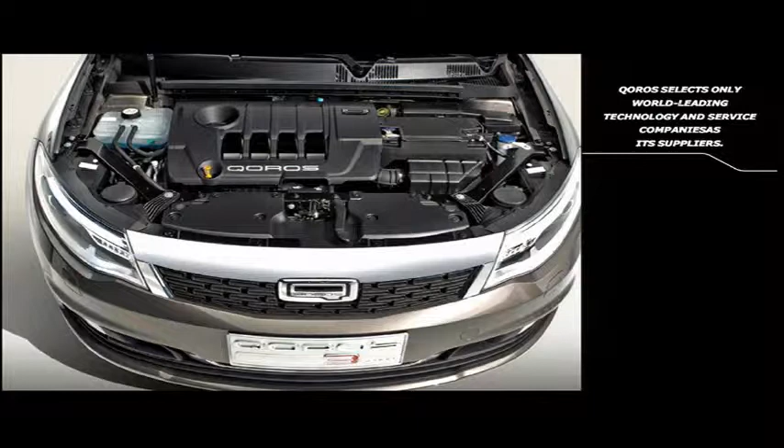Our product is all focused on design, engineering, and safety, as you will know. It's all about creating different car models, different cars and different products for new, young, modern, urban people who are all about services, IT, communication, and connection to the world more than average right now. For our product, we select all international and best technologies in terms of manufacturing as well as engineering.

We also choose all the best class suppliers and partners all around the world. So we can proudly say that all the international suppliers who right now support all the other OEMs also decided to support us, and we are very proud of that.

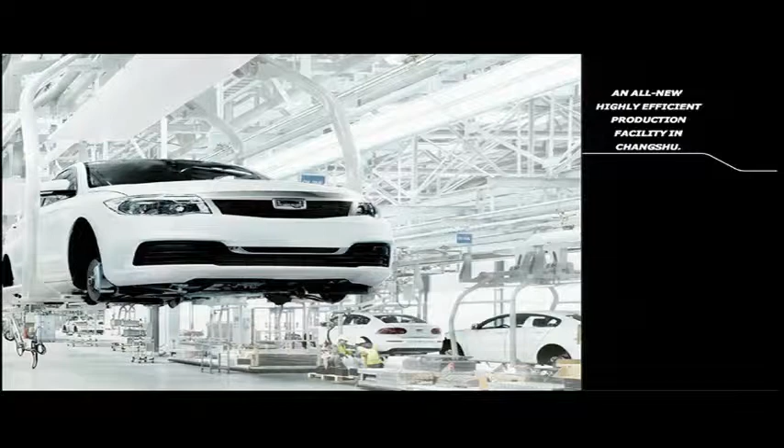We have an all-new, brand-new greenfield facility, so we're not only a greenfield company, but also a greenfield plant - the first one ever for us, in Changshu. This is around 80 kilometers away from Shanghai, in Suzhou, in Jiangsu province. All new facility, all new equipment, all new people, everything brought together within a couple of years.

And right now we are in serial production, and we are actually already selling cars for a couple of months, which I will share with you a bit later.

In terms of our facilities, we consider ourselves international, and we have facilities both in China as well as in Europe. In China, we have 3 facilities - our headquarter plant in Changshu, but also 2 facilities in Shanghai. The first facility in Shanghai is in Lujiazui, where we have our operations center, and where we have all the marketing and sales and the typical HQ people.

But then we also have a second facility in Shanghai, which is our tech center. It's also in Pudong, where all the testing and engineering and the hard work is happening. Besides that, we consider 2 locations in Europe as well.

Our design center, QDT, is based in Munich. Our design chief, Gerd Hildebrand - if you know the car from BMW Mini, where he used to design Mini - now he designs Qoros. And we have a very big collaboration with Magna Steyr in Graz, Austria, where hundreds, if I would like to say even thousands, of engineers helped us in partnership to develop the car.

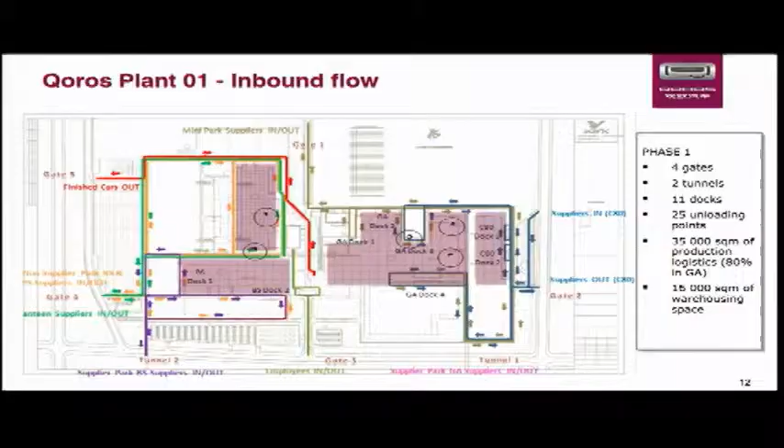This is our overview of the plant. You can see here all of the flow. Here is a mini park on the north side where all the sequencing suppliers are holding on, small facilities between 2,000 to 6,000 square meters. And we have a direct internal road to control the JIS transport, so no on-road transport.

Here is our plant, and here you can also see tunnel 2, which already exists and is in use with the stamped part suppliers, through which we transport material with special tuggers, with non-standard trailers built specifically to match Qoros racking.

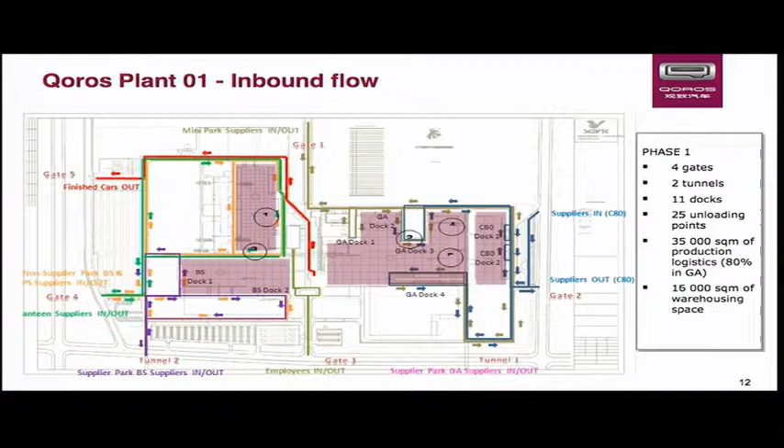Here is the second tunnel, now under construction, which we will need for the second part of the logistics center. On the south of the plant, the supplier park is also building up some suppliers for general assembly for the other parts.

Then we went to plan material flow. It was two parallel activities where we needed to make strategic decisions, having in mind all the products, the models, and one facility—what are we going to do about it? From all the varieties of methods available, standard in the industry—sequencing, Kanbans, everything—what do we want to do? Investigate one by one, match ourselves, or just go with one lead? This is where we made a very fast and very big decision.

We are going 100% kitting. Right now, in the total general assembly, only 12 parts are on Kanban. Everything else is kitted. That means we can swap models, change models, produce with 100% flexibility on the line, and operators can barely recognize that they are building another model—they just pick parts from the box. At the same time, we said, okay, this is the method we are going for, and what's next?

Strategical equipment sourcing. What equipment do we want to have? Because if I, 3 years ago, collected all the catalogs from all the possible suppliers in the world, I could choose forever, but I need to choose the type. Not a type of forklift, but are we going forklifts? Are we going tow motors? Are we going platforms? Out of that, we said we are going all mobile.

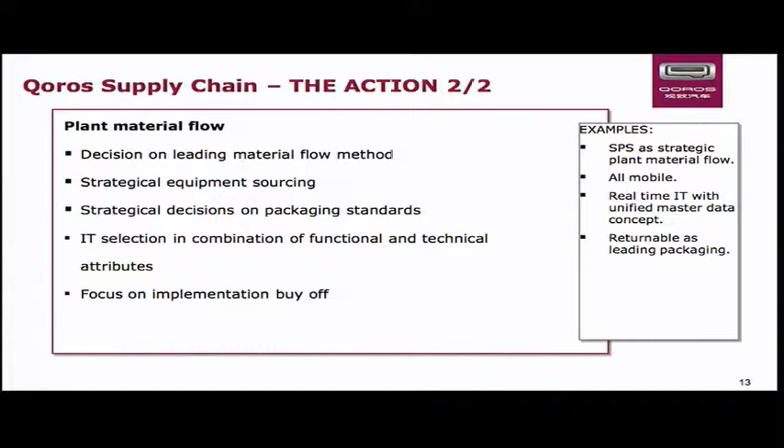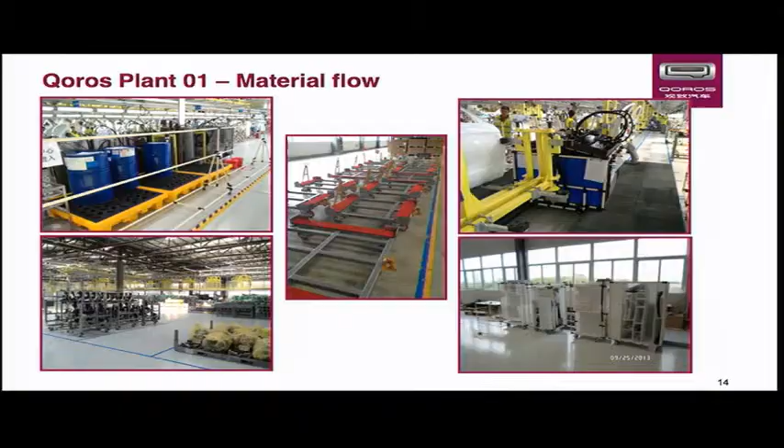One thing I'd like to mention here, which we had a lot of fun with but also was one of the challenges, are all the non-standard single cases - single things that we need to take care of in the plant that normally you just forget.

All of the chemicals, all of the jigs that you have to return from general assembly back to paint shop, all of the labels, the bags and everything, which in a normal plant launch you usually put on a lower priority. We were a new company. We had to make sure that we're not going to only have it on a lower priority, but also not forget about it. So it was a big challenge for us to have a standard process where all people know how to work in it, but also know the exceptions. Engineering a supply chain for a VIN label or a certificate paper that comes in once in a while and has to be specific, making sure they use the same equipment and methodology for all those non-standard special cases, that was a big challenge for us.

As a result, we are very happy with what happened in the plant and with our supply chain. We are very grateful for what happened in our supply base, for all who cooperated with us throughout those tough times. We have above average responsiveness and very low risk against high complexity.

Right now in the plant, in the Chinese model that is already launched, the sedan, there's something around 200,000 variants possible to be produced. Of course sales and marketing doesn't order all of them, but we are still able to produce them.

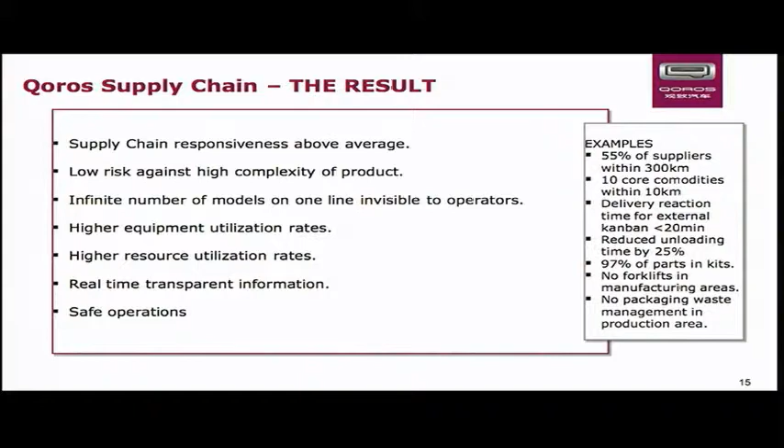We have a higher rate of equipment efficiency because the operator only assembles, he doesn't have to go away from the station or make a choice. We have higher resource utilization, real-time transparent information, and at the end, we are safe. We pay high attention to our operations, making sure the equipment, the IT, and the operations are safe for the people.

Thank you very much, I hope you enjoyed it. A couple of insights about us.

At the very end, I'd just like to say this is our latest product, the Qoros 3 Hatch, which will be premiered this Sunday at the Beijing Auto Show. This is our second model, and we are very proud to say, I personally like it a lot, very European style. It got the Red Dot Design Award. For those who know and don't know, this is a very prestigious design award, and we are very proud of it, and we like to show off for it. Thank you very much.

Thank you very much, Paulina, for sharing all of that with us. I think it's really fascinating to see the opportunity to start with the supply chain vision and build from there. There aren't too many places in the world where you have that opportunity, especially with a new brand starting from scratch. So I think that was really interesting, really useful. We'll come back for more, I'm sure there'll be plenty of Q&A. But let's move swiftly to our next presentations.

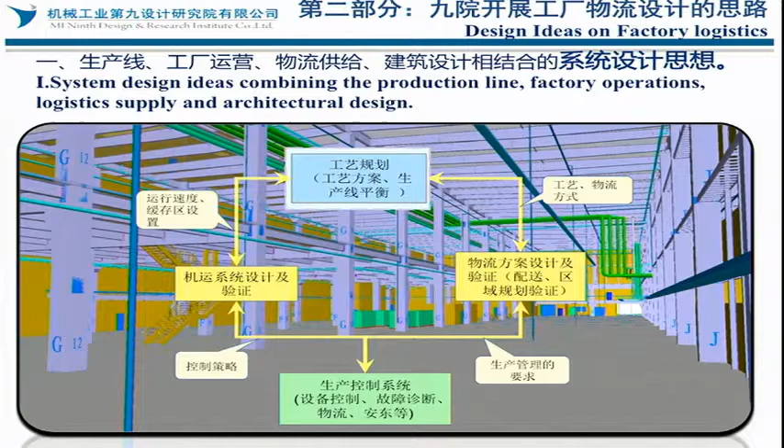We are mainly focused on verification and control of the processes, considering the equipment, the control of equipment, and the diagnosis of potential failures. We also need to consider safety so we can satisfy future needs. So we take the workshop as a box, and this box has to surround a core - that's our designing philosophy.

Then I will be talking about logistic program design and verification. We first needed to design the logistic process, considering the status quo of logistics and distribution to find weaknesses so we can optimize the process.

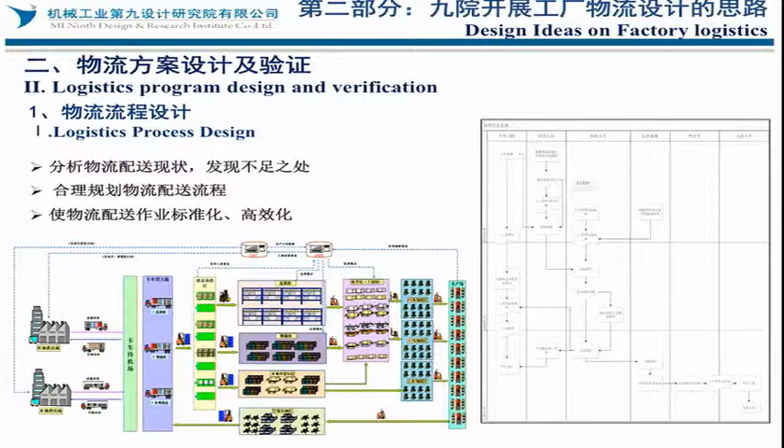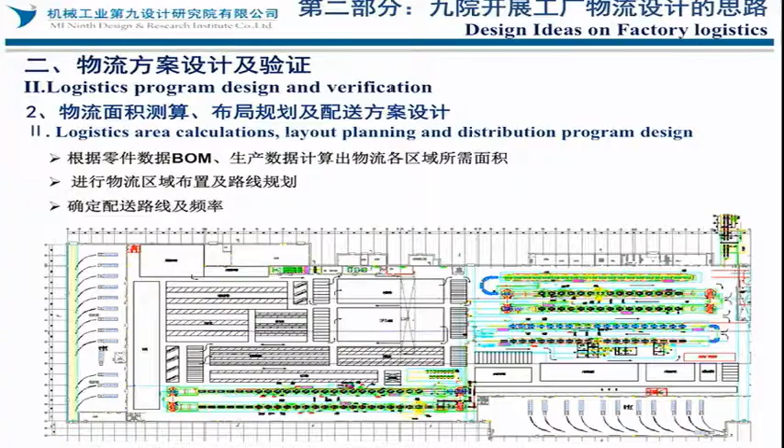Secondly, we needed to consider the total area taken up by logistical programs, and we have software to do the demonstration. We calculate the area required by each logistic item, and we need to design the routes and frequencies as well.

Thirdly, we also need to do a simulation on the EM plant software to do the analysis. Through the simulation, we can test whether the plan is in line with our original thoughts.

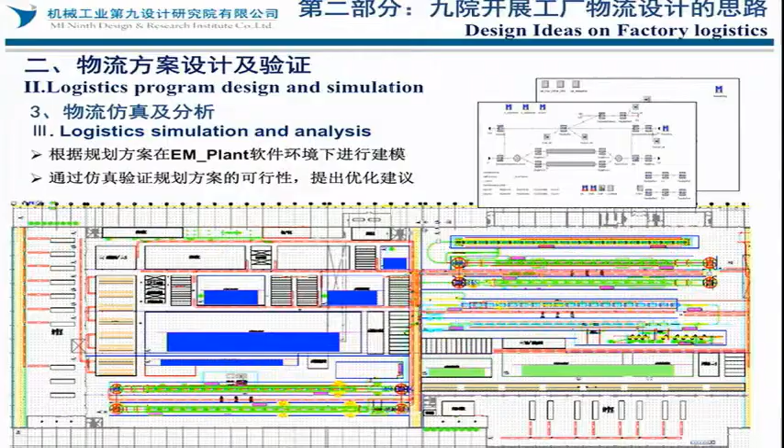I want to play an animation - I don't know whether I'll be successful. This is a simulation of a designed factory in Jilin.

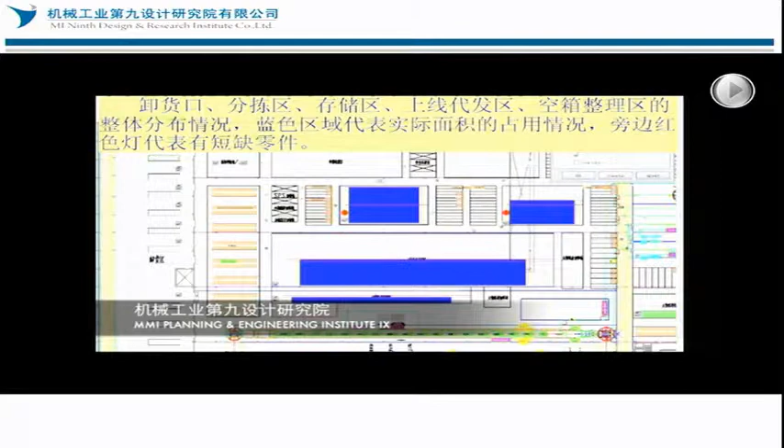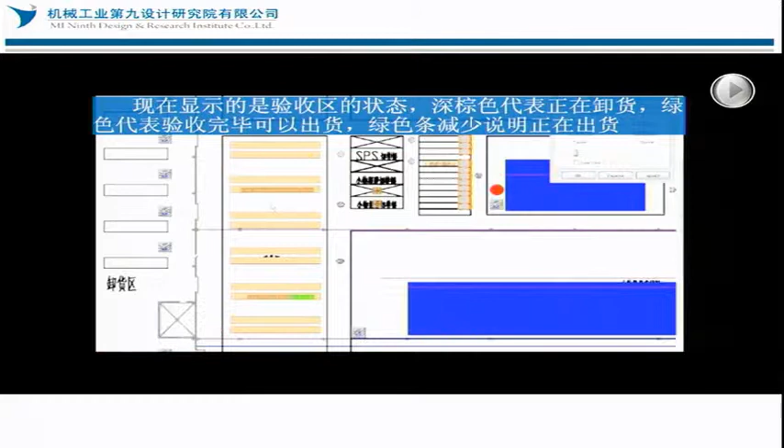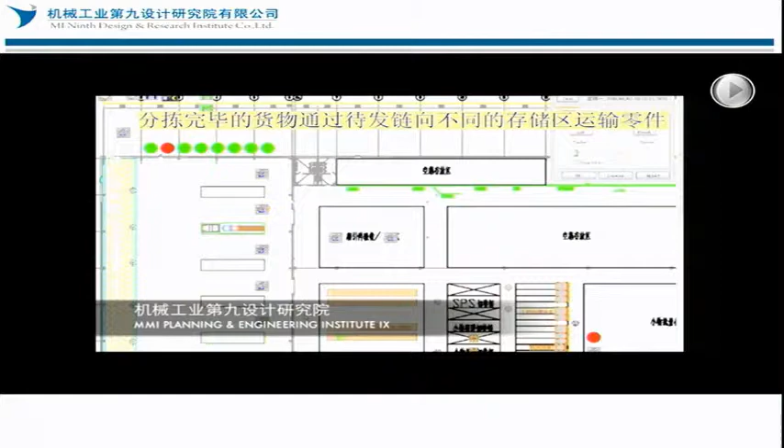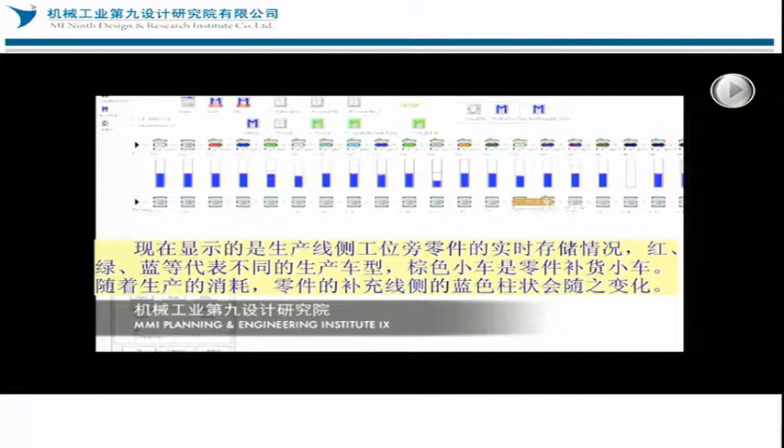This is like a loading, unloading, and waiting area - this is the area taken by each function, and this is the waiting area for items which have run out. The green area means the post-verification area, and this is the unloading area shown by red light, where red means occupied and green means normal. This is the sorted goods to be dispatched to warehouses, and these are parts by the production line showing the stockpile, with small vehicles for replenishment.

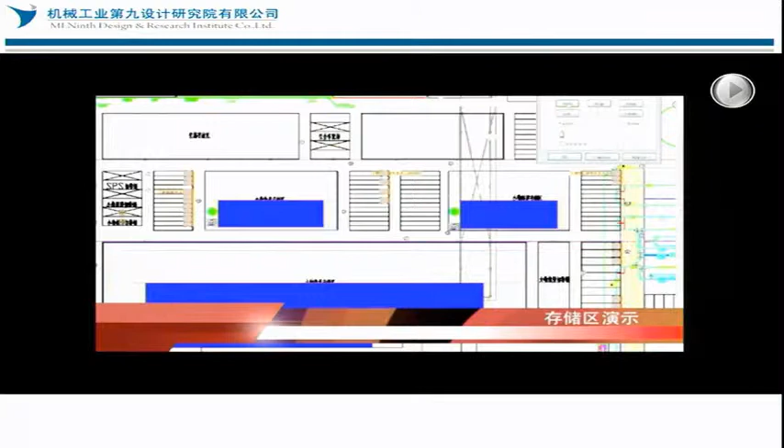With changes in volume, there will be timely replenishment. This is the store area - a real-time picture of the store area and the inventory. So we use the software to do the designing for logistic purposes, and they can satisfy the needs of the factories.

Secondly, I'll be talking about integrations of different kinds. I mentioned that we design processes, how processes can be in line, hand in hand with logistics.

This is Volkswagen's new factory in Foshan City, and this is the supply area, the just-in-time or JIT area. We designed this area closer to the exterior of the factory, and also closer to the assembly line - like the gears, transmission, and framework placed here, with SPS parts and sequenced products piled here so they can get to the assembly line very quickly.

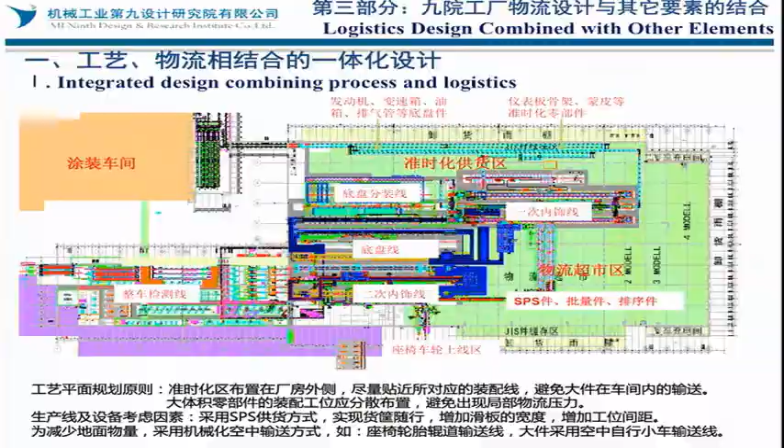This area is a painting workshop, and we put them into sequence - this is for seats installation. We put them into different places to avoid huge piles in one area - this is a new design, and we also adopted the SPS supply method so we can realize just-in-time.

To realize just-in-time or just-in-sequence, we need to consider the distances, and we also need conveying belts - we call it aerial conveyors. This is a factory for Volkswagen, the newest one for Volkswagen in China.

Then I'll give another example, Toyota. Also a new factory - in the Toyota new factory, you see the production line is quite compact, and we shortened the distances of different kinds for the car body. For example, this is an entry point for parts.

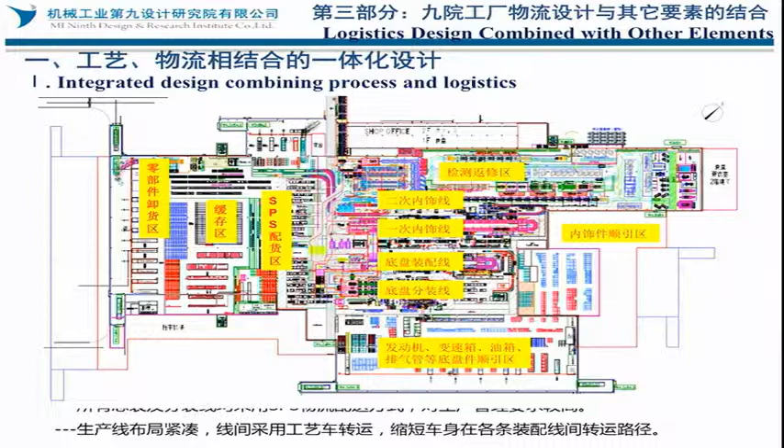This is SPS supply, very rigid - SPS the whole way through, and this is the just-in-sequence supply methodology, or JIS methodology. So these are motors and transmission, and this is interior parts piled up here. I'm thinking, for Toyota, this kind of layout is very rigid.

For the assembly line, there is a high requirement on management because Toyota emphasizes rigidness. They have production based on orders, and the pace or rate is within 60 seconds per unit, so there is a high management level required.

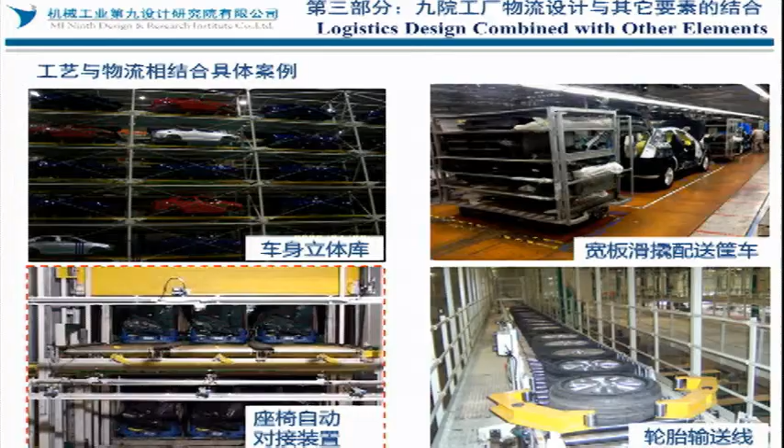This is number one. Now I would like to talk about specific cases. As I mentioned, let me see if I can go back to the previous slide. Maybe we can look at the second example.

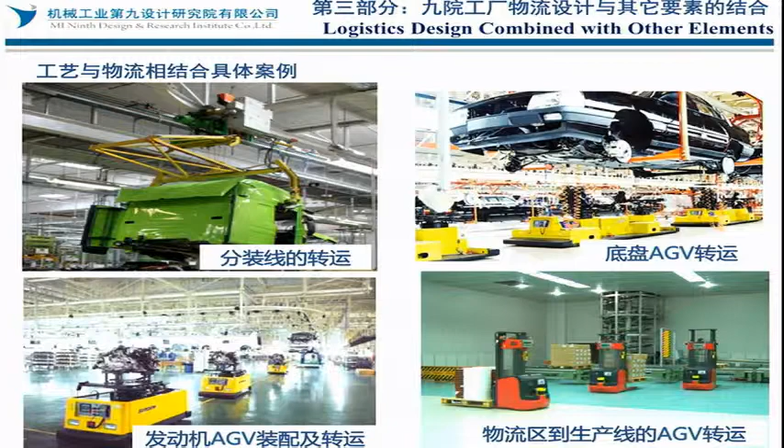The assembly lines, transshipments, the chassis - AGV is automated, and for engines, AGV assembly and transshipments. These are the newest case studies. One line was not shown.

I cannot go back to that slide, but the whole floor is flat - there are no barriers at all. All those things that can be barriers are put in the air, not on the floor. This is the latest concept of Toyota. In Tennessee, they have the newest plant, and the concept I mentioned is all like this - the floor is flat, no barriers.

About the design within the line, for example, the mechanical transportation design and simulation - I'm still talking about the total assembly line. Within the line, there are three types.

Previously, they were suspended in the air, but for new ones, it's a friction chain. Basically all adopted by Japanese companies, very small. The error rate is low. If there is a problem with one of the cars, you can just unload it, and the flexibility is much higher. The latest production line we designed is a Volkswagen system, widely adopted.

It's called the EMS single rail transmission system, EHB in German. You can see the chain - it's very flexible, using servo motors for different products. You can adjust their heights very easily. For all Volkswagen plants, we are designing them this way - for example, in Foshan plant, Changchun plant, and the new Chengdu plants, we are all using this method to design.

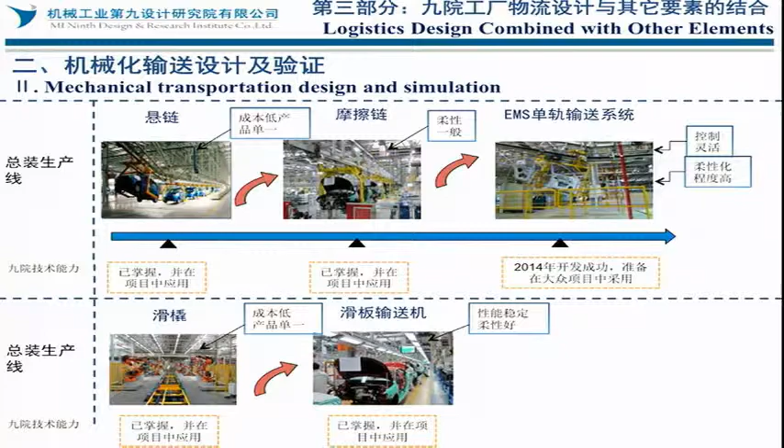I'm sure the application of such technologies will benefit the interline logistics a lot. Now I would like to show you the simulation of the assembly line - final assembly or general assembly production line. This is a simulation of the line.

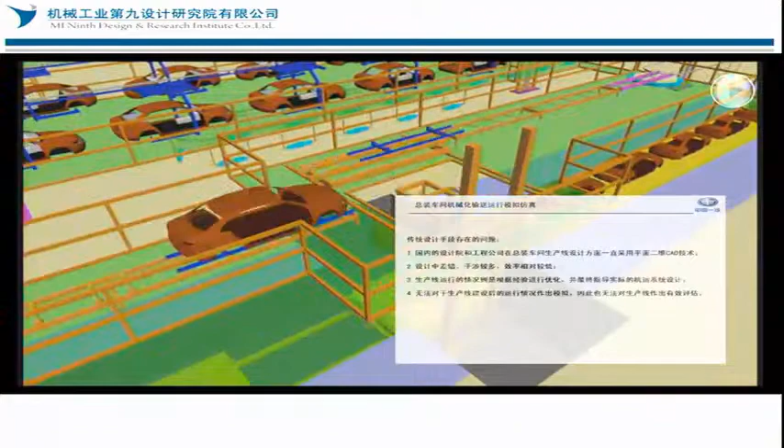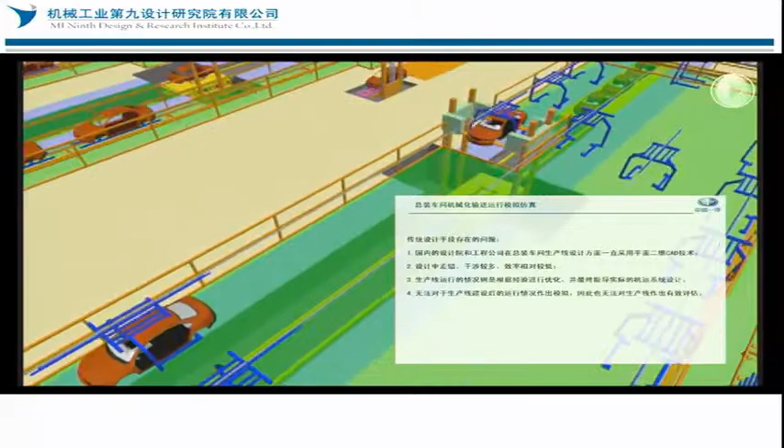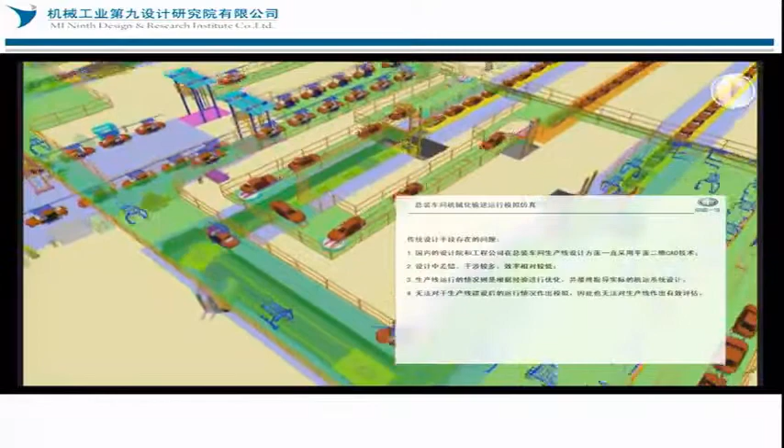About the problems: for domestic design, basically they use two-dimensional CAD technology, but we are using 3D ones. The errors and interferences for 2D - this is a problem. Third, the operations of the production line should be optimized based on historical data - not just the rate of operation of production, but also the impact on the logistic platform.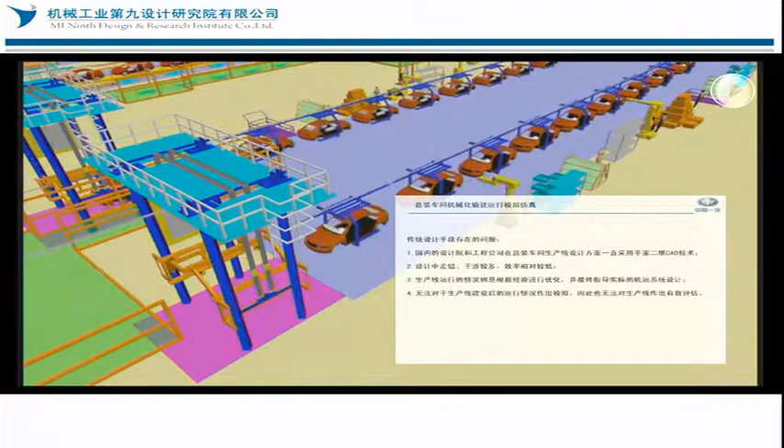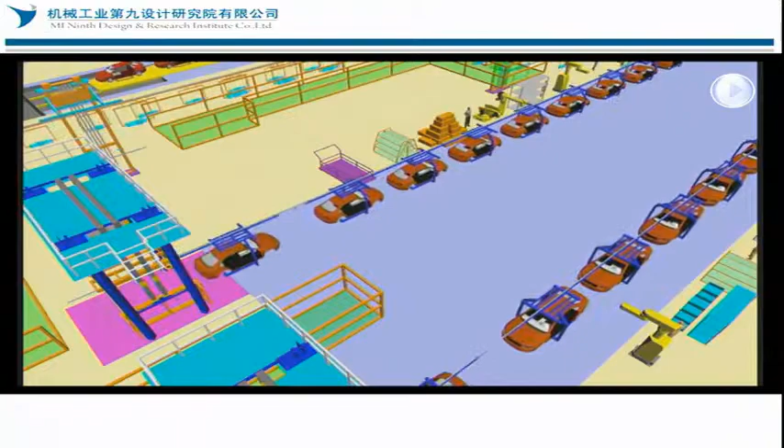The previous problem was we could not simulate the production line. Therefore, for future production lines, to meet the needs for high rate of operations, we could not have effective evaluation. But if you did this before the design of the plant, it would be very good for future evaluation of plants. So in our joint ventures, we are doing this before production starts - that is the evaluation of the production line.

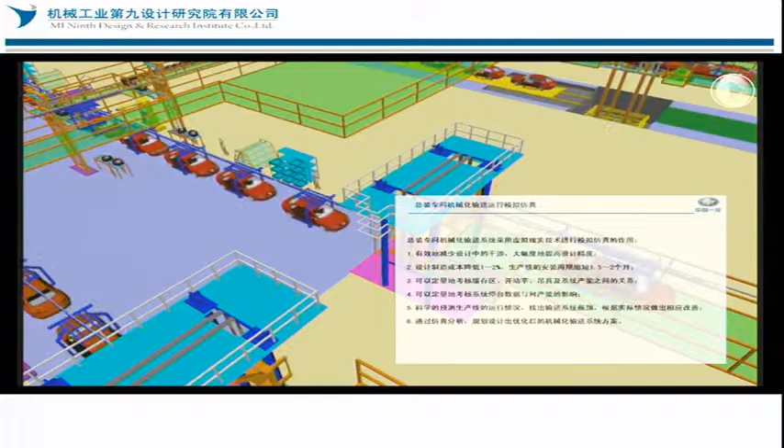And we are also using virtual reality to reduce the cost of design. The construction and installation cycle has been reduced. We have also considerations for buffer zone, mobilization rate, etc. - that is to say, in this process there are a lot of buffers, but how many buffers, how large is the area? We can use this simulation to determine, for example, the platform and the impact on production capacity.

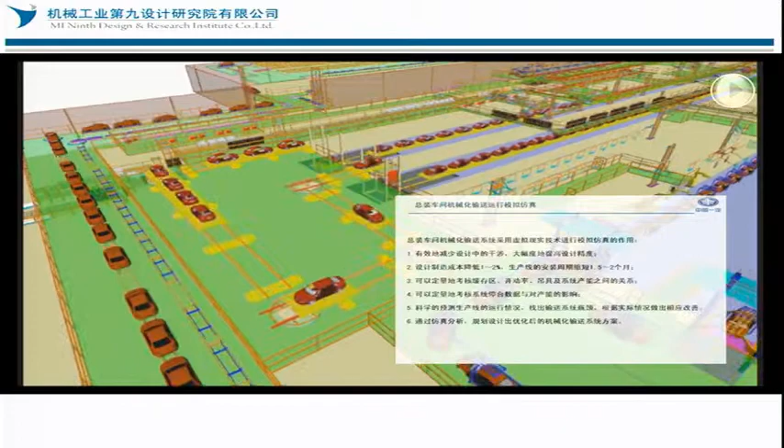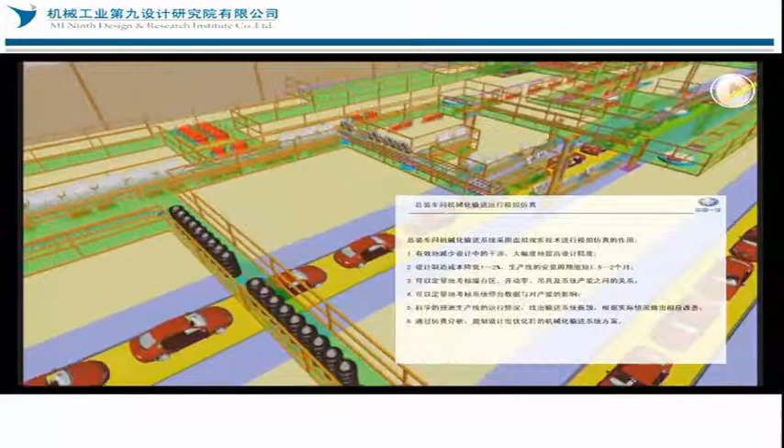I don't want to go into details - that is to say, we can optimize the planning design. After optimization, we can address very well the problems of previous production lines. I cannot move it, and I think this simulation is too long, I don't think you're interested in this. Sorry. This is the Volkswagen final assembly line.

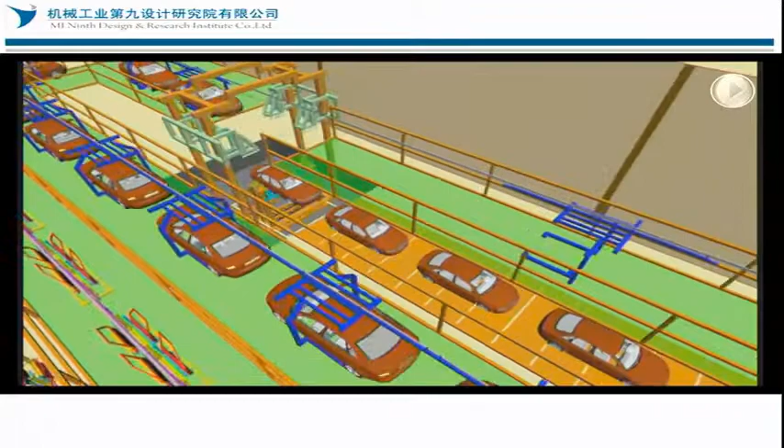Okay, that's all for the simulation. Next, I would like to talk about the function of logistics and production control system.

First, at the corporate level, we are using ERP, very familiar to you. Now, what we are doing, we need these two levels: one is hardware PLC, the equipment, and secondly, the most critical one is ERP lacks data support. We need to add the production execution layer to increase the efficiency.

Since you are specialized in logistics, I'm sure you are very familiar with these things. Its functions are as follows. First, it should release information on production to visualize the management. Second, it should accurately collect data on production status and equipment to have real-time monitoring over the whole process, diagnosis and control. Thirdly, it shifts from passive resolution of problems to active, proactive management.

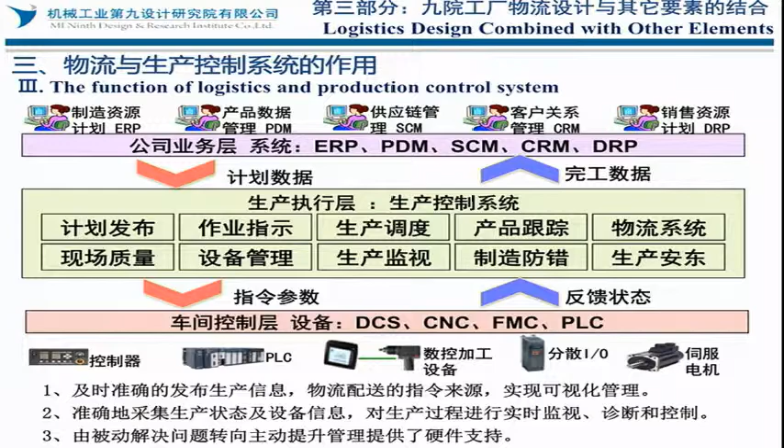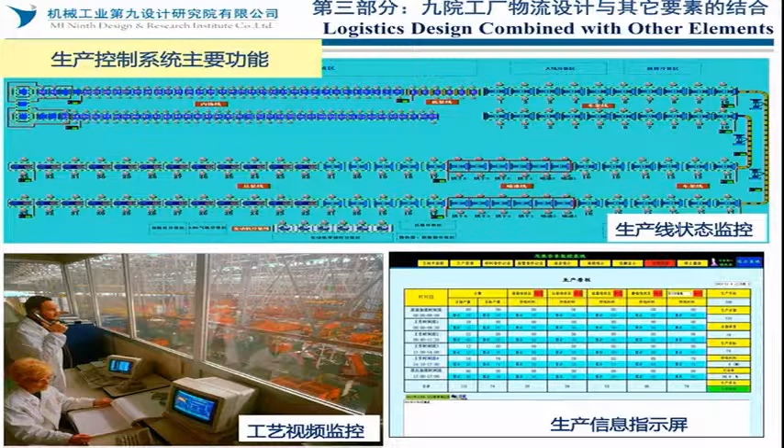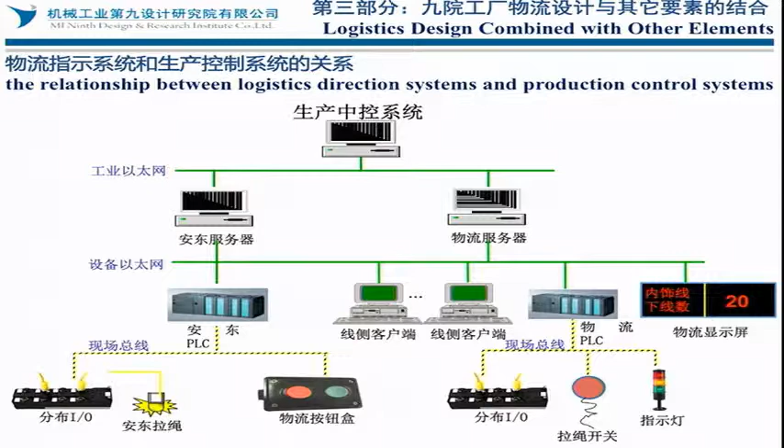Our attention is mainly focused on this now. This is the major functions of the production control system: monitoring of the stages of production line, output status, shifts management, type management, logistics information, and the Andon cords - that is the monitoring of the status of the production line and the equipment.

This is the logistics indicator system. You can see the unloading area, the pending departure area. I think the slides are going very quickly due to the time constraint.

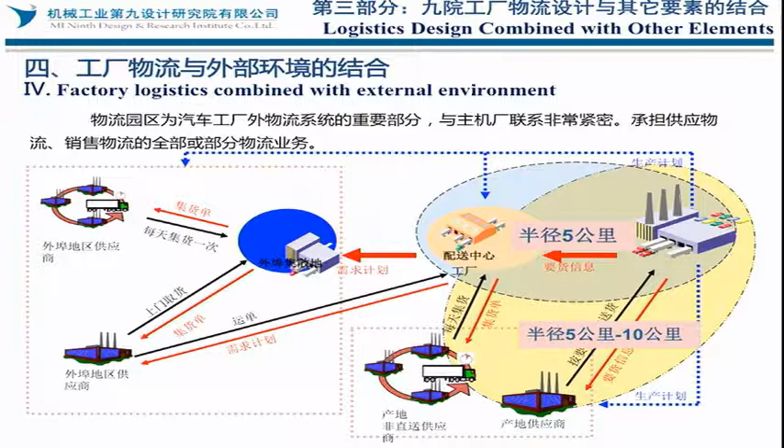The fourth part is about factory logistics combined with external environment. When we consider logistic planning, be it the production location, the suppliers of materials, and paths need to be within a radius of 5 kilometers. I want to skip the non-localized suppliers.

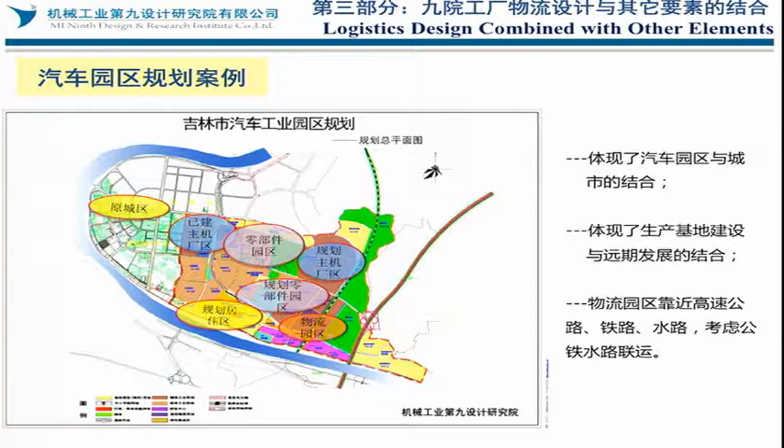This is phase 1 of the auto park area. And this is plant area, the spare parts area combined. Regarding logistics, this is the railway line, so we can set railway line, freeway, and the rivers, multimodal transportation.

This is the planning for the industrial park. Second, about the Chengdu Auto Logistics Park, you can see within one zone, we consider parts and components, logistics organization. You can see 70% of the parts and components are within the logistics park. The radius is 5 kilometers. This is the Chengdu Auto Park.

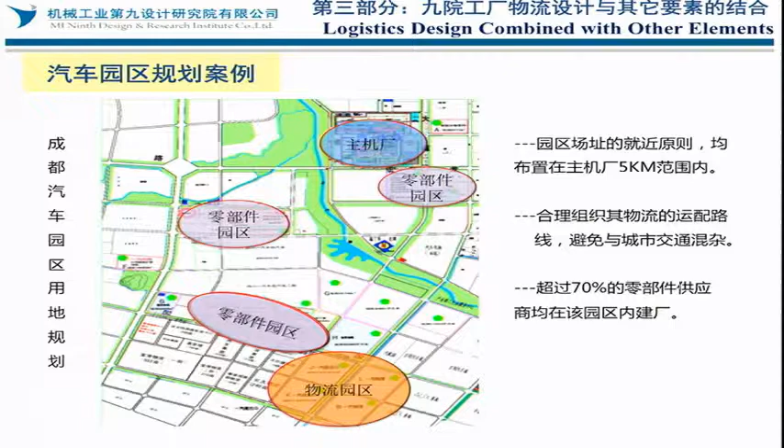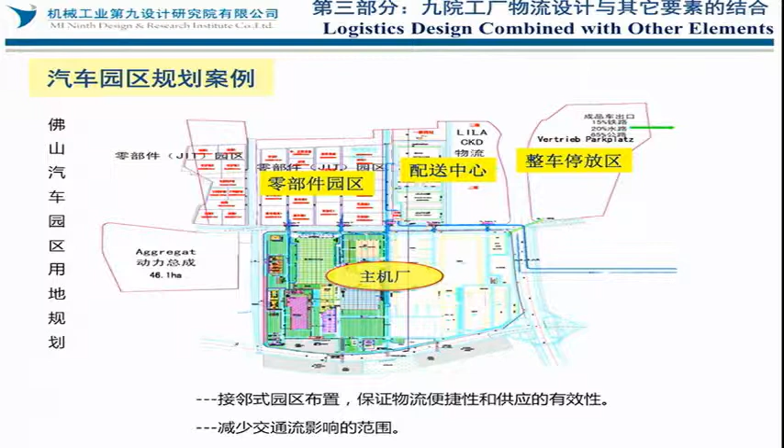The third plan is the Foshan Park. More direct, straightforward - you can see they are adjacent to each other. OEM company phase 1, phase 2, neighboring to them a large suppliers zone and logistics zone. The three are next to each other. So this is the plan for Foshan Park, Auto Park.

Fifthly, I would like to talk about cases on logistics combined with architectural design. This is a Volkswagen plant. The plant space, plant zone was limited, so they get the logistics to the outside area through sorting, through the corridor to the workshop for general assembly. You can see the general assembly uses SPS.

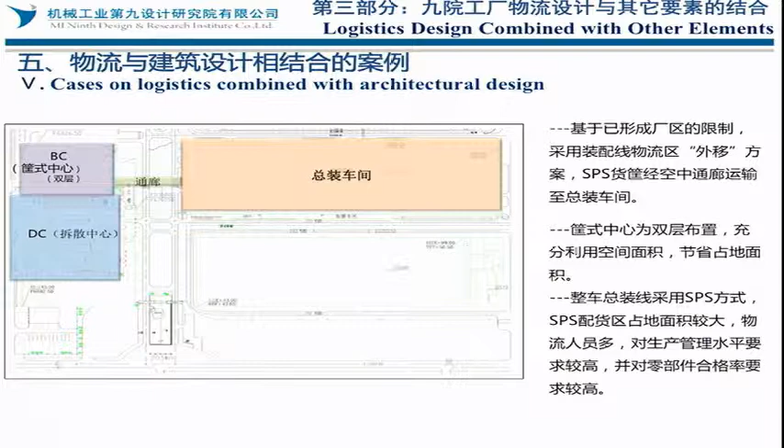The consolidation area has a large area, a lot of logistic personnel, but it is still very hard to reach the 60 seconds target, like Toyota. But this is architectural design.

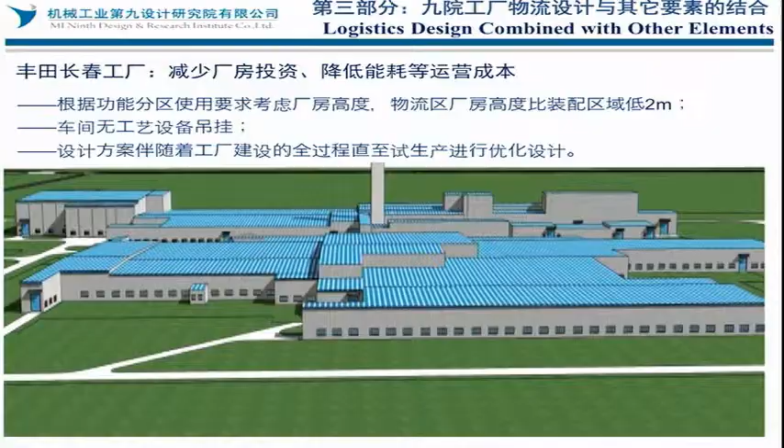Another is the Toyota concept. In terms of the height of the plant, you can see some high, some low. About logistics facilities, they are 2 meters lower than the assembly facilities to save energy.

And the floor plan also shows there is no hanging or hoisting in the workshop. It's a whole process optimization. This is the characteristics of Toyota plant design.

And other factors about Volkswagen's plants, its characteristics are as follows. First of all, the control center - through the glass walls, the key control points of the several workshops, they can realize, visualize the management of key control points. For general assembly lines, they are using hoisting to reduce or eliminate the barriers on the floor.

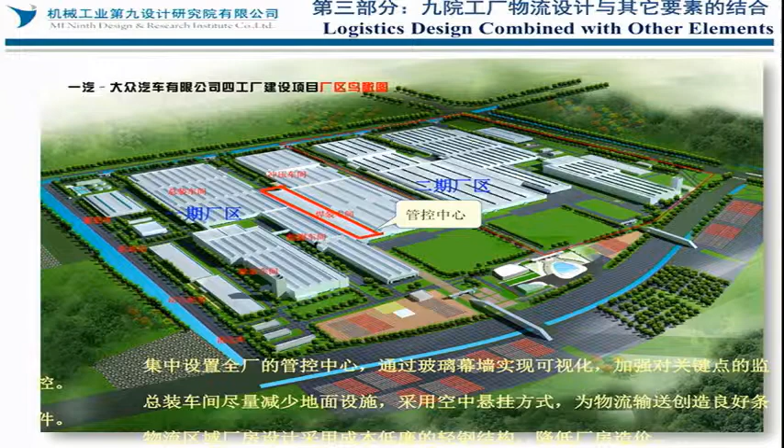About the logistics zone, the assembly line is basically adopting racking. However, for logistics, they use low-cost structure to reduce the cost of the facility of logistics.

And fourthly, for post-production shipping, we use high corridors acting as a bridge, some spanning over a road, some in the form of underground tunnel, to facilitate logistics and provide convenience for logistics.

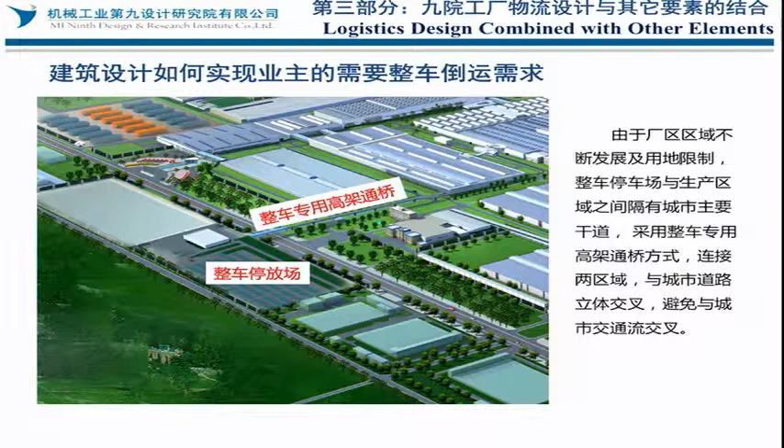That's all for my presentation. I don't know whether it is of interest to you. And I am not coming here alone - we have experts with us, experts in assembly lines, so if you have any questions, they will be in a better position to respond to your questions. Thank you.

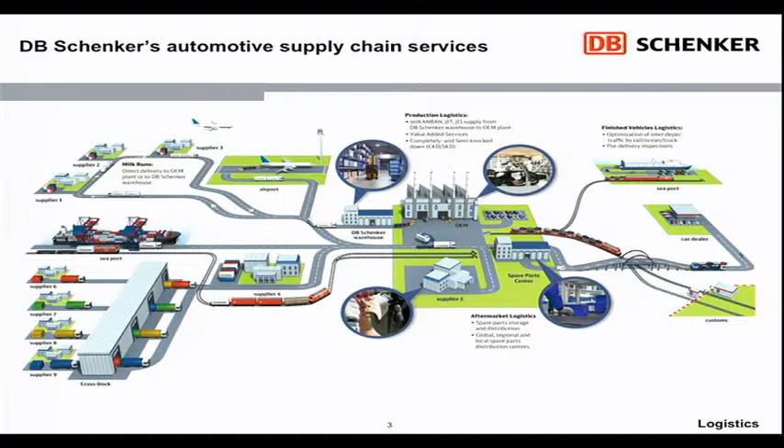This is what I'd like to show you in greater detail with a short video. Some of you may have seen it, some don't. I hope I can get this thing to work.

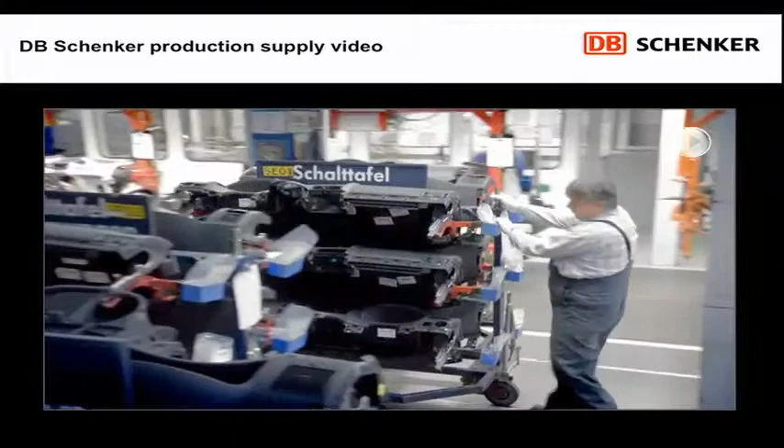The automotive industry has one of the most complex, highly developed supply chains, where a continuous, reliable flow of goods and perfect timing are crucial, and where every piece has to fit perfectly into the supply chain, accurately and without tolerance, reliable and sustainable. Welcome to our production logistics world.

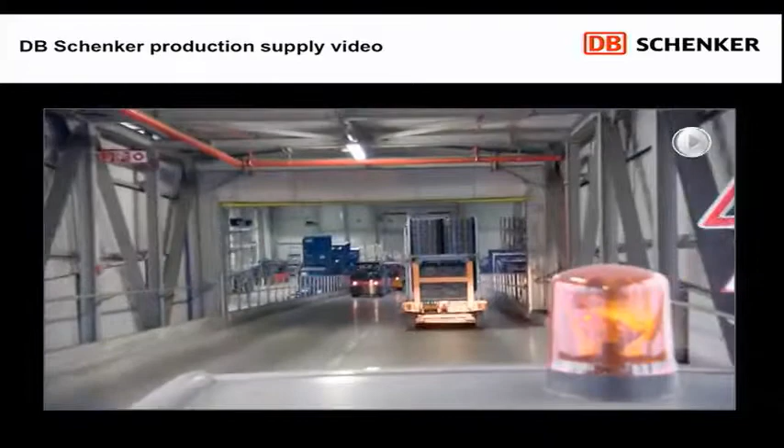DB Schenker is one of the world's leading providers in production logistics services for OEMs and their suppliers. With more than 20 years of experience in the automotive sector, we have proven to bring maximum value to a long list of customers worldwide. One of these customers is Volkswagen Nutzfahrzeuge. Located next to their manufacturing plant in Hanover, Germany, the DB Schenker Logistics Center receives and handles supplier components and gets them ready for the production line, non-stop, every day.

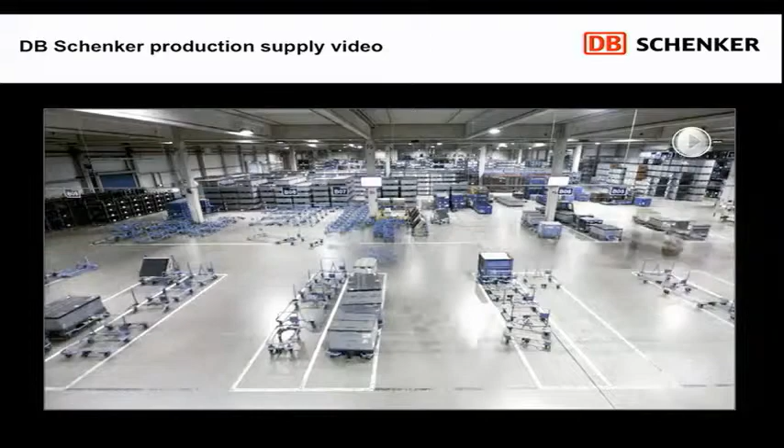Minute by minute, the production line calls off the required parts for the upcoming hour of production. To meet those tough timelines while keeping inventory carrying costs as low as possible, DB Schenker deploys state-of-the-art storage and picking technology. In the Hanover facility, we use an automated storage and retrieval system to store around 2,500 different small parts, whereby every 7 seconds a part is picked or put away.

The parts required to be delivered at a predefined production sequence are picked using pick-by-voice technology. This enables our employees to use both hands to pick and pre-inspect every single part, filtering out any quality problems that may occur at the OEM's production line. This ensures error-free sequencing and time and cost savings.

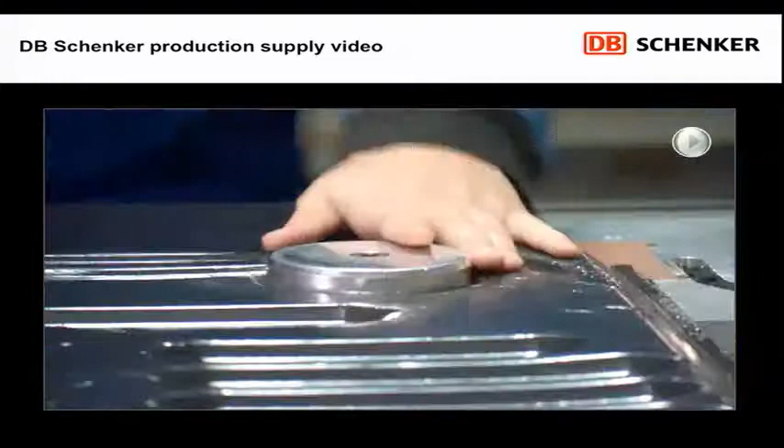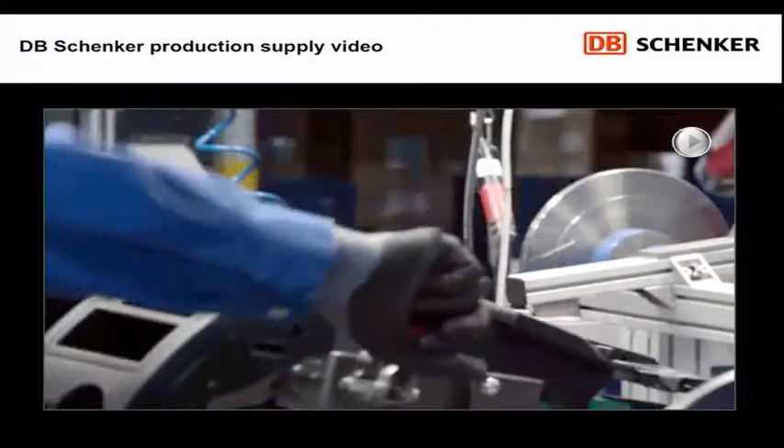Our value-added services, such as light assembly of modules and customizing of specific parts, are postponement services which reduce the need for holding a high variety of parts in stock. Here, for example, you see the assembling of a cockpit, built from different supplier parts into one final module, which is then delivered just in time and just in sequence to the production line.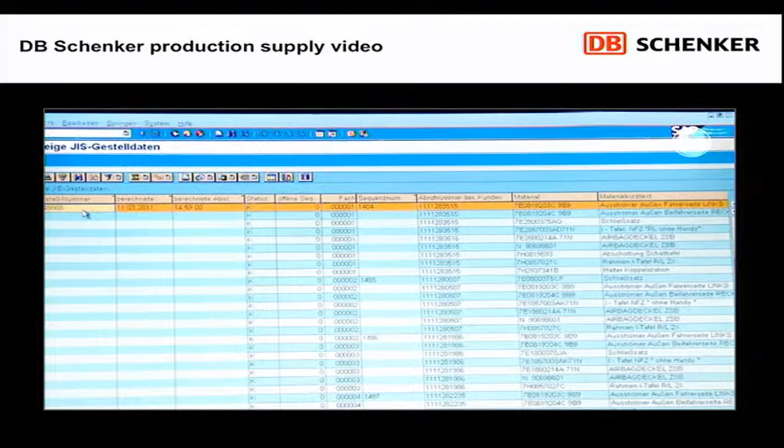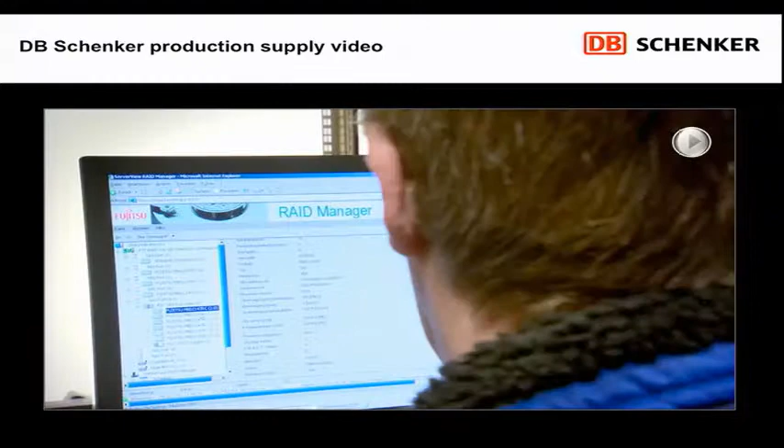All these services are empowered and enabled by our first-in-class technology and IT system. Through interfaces to different Tier X suppliers and to OEM systems, our warehouse management system, SAP Automotive, ensures efficient order processing as well as VMI stock visibility for all involved parties. Our fully flexible IT platform allows fast expansion of the supplier base at any point in time.

Continuous improvement and optimization are the foundations of our success. Our flawless execution program of lean methodologies and tools, such as 5S, Kaizen, and Six Sigma, is standard in every DB Schenker logistics operation and has been proven to improve efficiencies and lower costs. DB Schenker experts embrace and emulate our customers' business philosophies, cultures, and measurements. Our implementation and IT experts realize replicable, cost-efficient solutions rapidly in nearly any location. Our standardized operation processes, methods, tools, and templates can be easily adapted to our customers' needs.

With decades of experience with numerous customers, we are one of the best partners for all production logistics services worldwide, leading to less implementation time, best operational processes, and profitable solutions. And we get leaner every day.

Okay, hope this was of interest for you. Not again. Can we go one back?

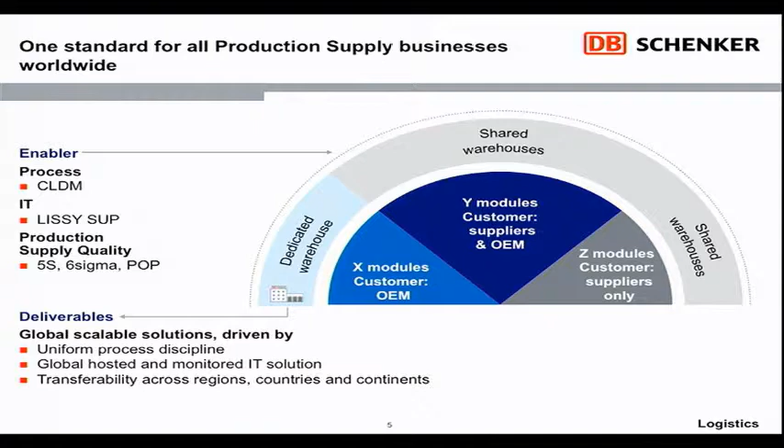So having this as our standard solution for the automotive industry, providing the OEMs' production lines, the deliverables we have to deliver to the OEMs are enabled by process discipline, by IT, and also quality. It's not only that we develop or implement this solution in dedicated sites, as you've seen in the video, we've also developed that solution to make it applicable for shared environments. So we can start in small environments for smaller volumes. It doesn't necessarily mean mass production, and that really makes it unique and scalable, and we can rapidly implement such solutions with the same quality standard as you've seen in the video.

Very nice example of that. Can I show you some names? What I'd like to show you here is a development we had a couple of years ago, where we started feeding into a production line with only a couple of suppliers for a premium OEM, really close to small batch production. But business grew for the OEM, and he was able to add additional modules and models, and by doing that we also expanded our business with that OEM and their suppliers, based on the standard we've deployed in that specific site, which, by the way, is a multi-user warehouse, meaning it serves several customers, not only automotive, but geared to fulfill automotive standards.

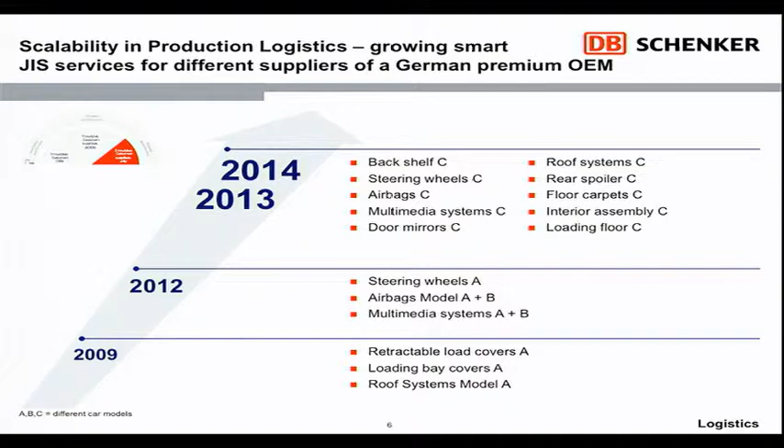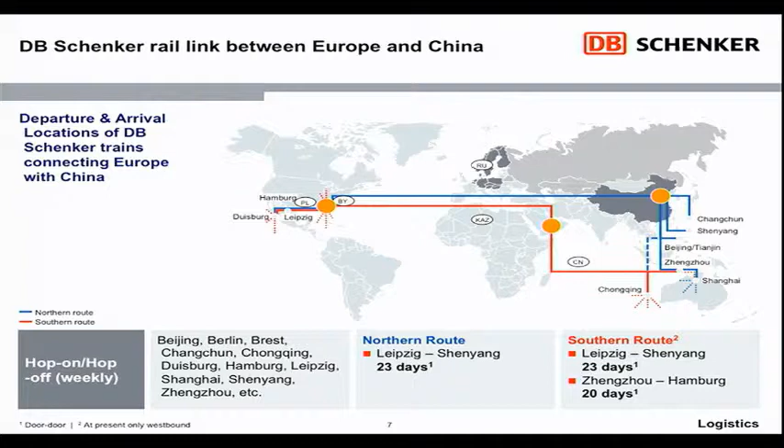But coming back to China, what we also do to connect China, especially for our European customers, is we have train solutions in place, especially for customers that assemble in CKD fashion here in China. We deploy that solution whenever air freight is not an option due to costs, but ocean freight is not an option due to time constraints. So we have a northern route to the northern part of China, but also a southern route.

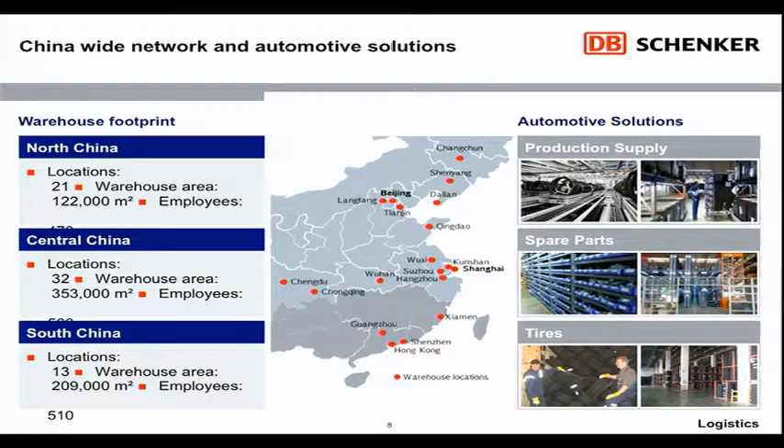Finally, I'd also like to show you our footprint in China. In total, we have over 60 facilities, just looking at contract logistics, meaning dedicated and shared warehouse environments. We're quite present here, as you see with the red dots. Speaking about automotive solutions, we're active in China with production supply solutions, spare parts, and particularly tires as well. So I hope I've caught up some time. This is the end of my presentation. Thank you.